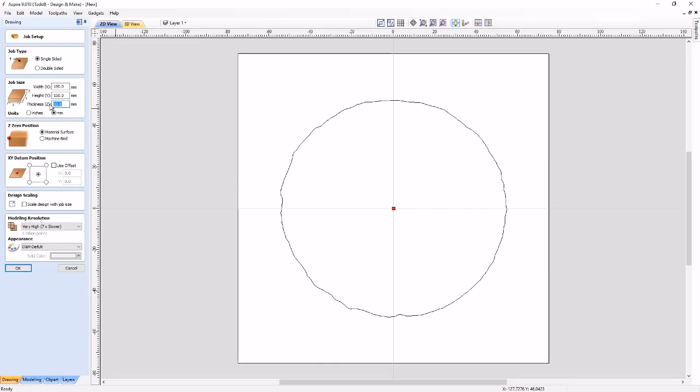Now I needed to go in, and I had forgotten that I was going to be using millimeters, not inches, so I needed to go in and verify the thickness of my material that I was going to be using in millimeters. So once I had that, I went in and selected that vector, and I'm actually going to create the wall thickness of my urn.

So I offset that vector about 15 millimeters. Wasn't happy with that - I decided to go with 10 millimeters instead. I think that was much better. Those are the only two vectors I'm going to need to create the two rings I need to build up my urn. So once I had those, I'm going to create a profile cut right through my material.

I'm going to go on the outside of those lines, and then now I'm going to go ahead and add in some tabs. I miscounted the number of tabs I needed, so once I added those, I went and double clicked on the ones I didn't need anymore to delete them, which worked out really quite well. I really only needed 4 on the outside and 4 on the inside.

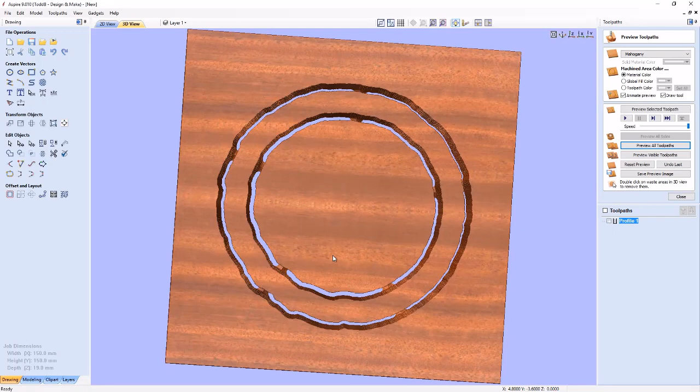I set up the actual dimensions of those tabs. I like to use 3D tabs, and I calculated that. Previewed my calculations, and everything looked pretty good. So I'm going to run this toolpath twice for 2 rings, which would give me a double, once I glued them together, the perfect height for the inside of my urn.

For the next toolpath, this was for the plate that goes in the bottom of my urn. I copy and pasted the outside vector into a new job, and then went ahead and created the tooling for that vector. It was just a profile cut, but if you notice, I forgot to change the thickness of my material.

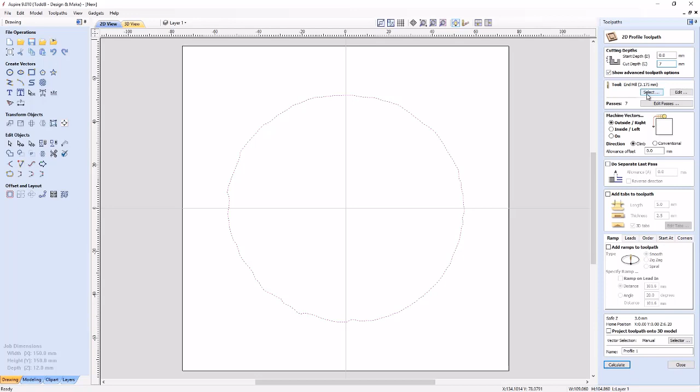Which is fine, it'll tell me that in just a minute. So I'm going to add in my tabs, make sure everything is fine. This time I'm going to add in 5 tabs. Check everything out, take a look at it.

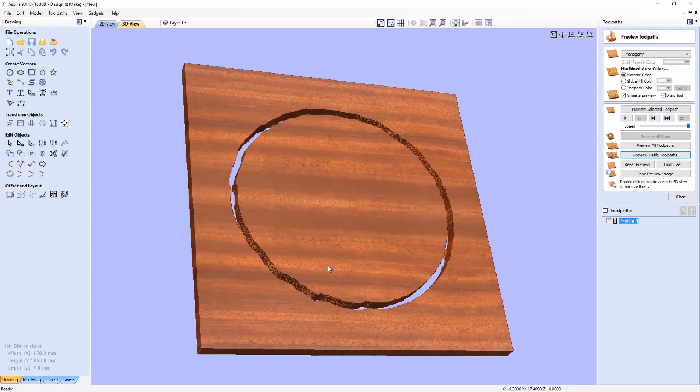I noticed then that my material was set too thick, so I changed that to the new material thickness, recalculated my tool paths. Took a look at those to make sure everything looked okay, and everything looked great. So I'm going to go ahead and save those off.

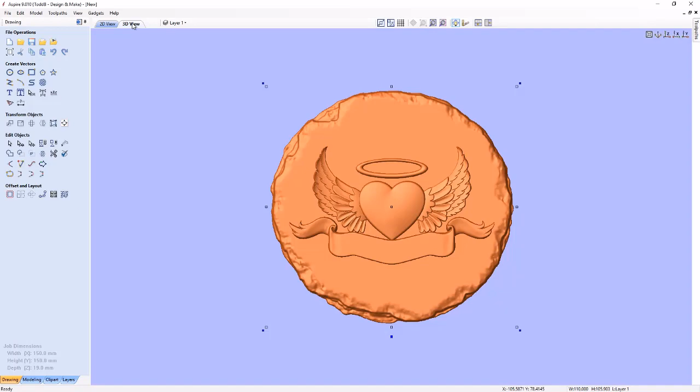The next thing I had to do was develop the toolpaths for the top. So I went in and created a job the same size I did for the rings. I brought in my assembled layout, sized it the same as what I used to create the vector to cut the rings with, made sure everything looked okay.

I imported the paw print vectors from the Furry Friends #1 project because I wanted to recess a paw print in the middle of the heart. So when I brought those in, I had to ungroup them, delete out the small paw prints, and then attempted to align the paw print with the center of the heart.

Now I couldn't see the bitmap representation of my component very well, so I ended up having to right click on that and change the properties, make the transparency a little bit darker so that I could make sure I could see what was going on.

Then I went ahead and created some text for VCarving on the top, the name of the pet. I chose a font that was pretty easy to VCarve, because I wasn't quite sure whether I was going to VCarve it or use a ball nose end mill to clean those out. So something without any serifs seemed to make a whole lot of sense.

I laid out the cookie text onto the ribbon and adjusted the kerning, and then I went ahead and created the text for the top flat spot of the garden stone.

This is where having no texture on that garden stone certainly helped out. Typed in the text I wanted, had to do a little bit of modification, decided that it wouldn't fit straight across, went back in again, made it into 2 lines of text.

That worked out great. Jogged it into place, copied that to the bottom. I wanted to use the same font size and everything with the stuff for the date at the bottom, so I copied it down there.

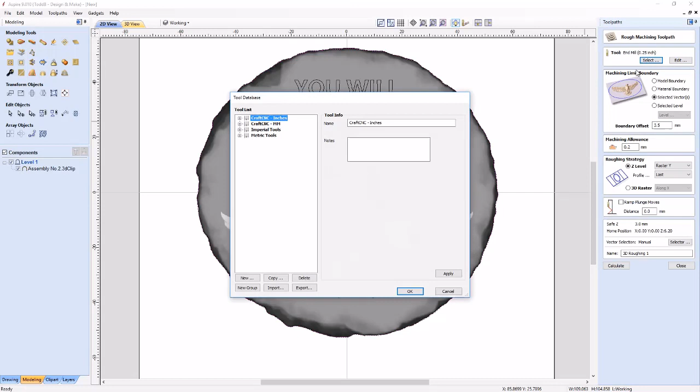Then I went in and set my boundary offset. I wanted that to be just slightly larger than the actual tool that I was going to cut with.

That way it would go outside my actual component a little bit when it was machining. Left a little bit of an allowance behind and went ahead and calculated that. Of course, I previewed my tooling to make sure everything was okay, and that looked great.

So now on to the finishing pass. I went ahead, selected my tool, offset it again slightly larger than my tool itself, just so that I could overshoot the edge of the component, and I went ahead and calculated that.

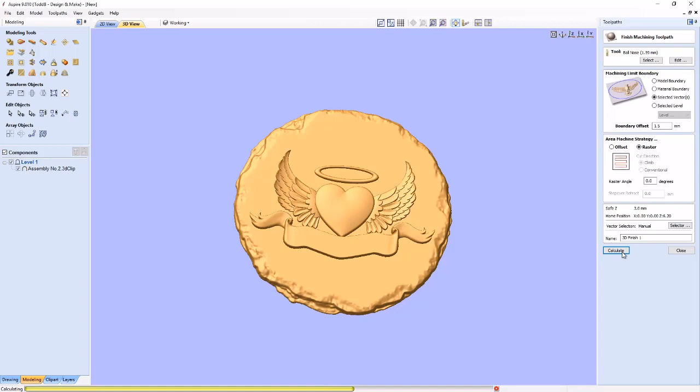That looked great. Now next it was time to go ahead and VCarve or pocket out the details on the top.

So I decided to go ahead and pocket out the paw print with the same finishing tool that I used for the top. I figured it would save me a tool change and some time, since it would take a bit longer to VCarve that. So I went ahead and did that, made sure that I projected that toolpath onto my actual component, and off I went, and that looked fine. I did want to make it a little bit deeper, so I adjusted the toolpath slightly. That looked great.

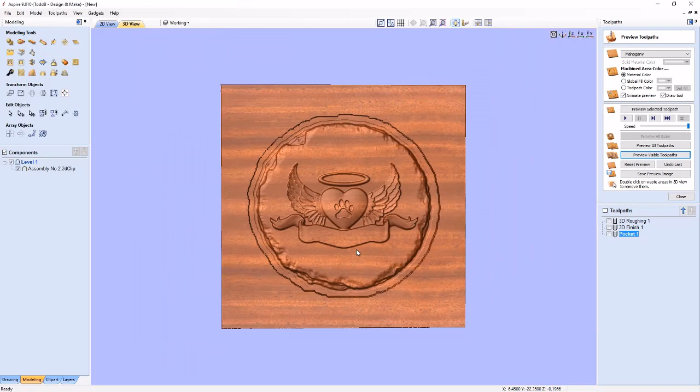So now I went on to the text. I wasn't sure whether I wanted to pocket that out with my finishing tool, or whether I wanted to VCarve it. So I thought, let's test it out with the pocketing tool and see what happens. I did a quick little try, made sure I projected it onto my component, and it didn't work. So then I had to go in and VCarve it.

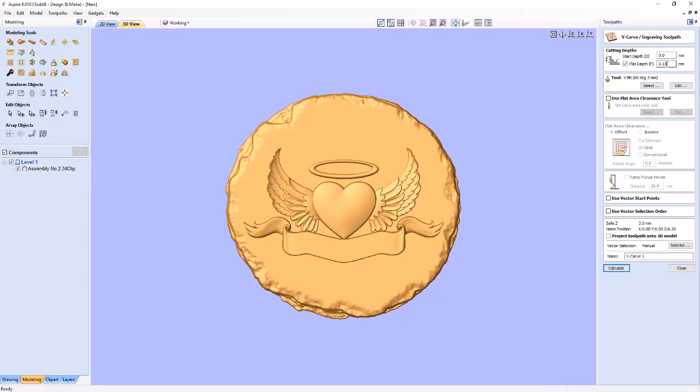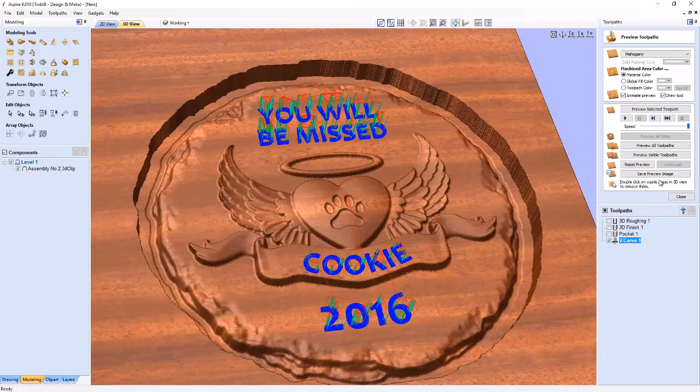One of the great things about this is when you preview your toolpath, you can make sure whether or not you're going deep enough with your VCarving. So you'll notice I do this 3 or 4 times, slowly making it deeper until I'm happy with the result. Really what I was looking for was just to make sure the contrast between the paw print and the text was fine. If I had been thinking, I could have just used the same depth as the pocket toolpath for the paw print, but I decided to do it the hard way.

Yeah, I guess I was happy with that. So now I'm going to go ahead and do my profile cut.

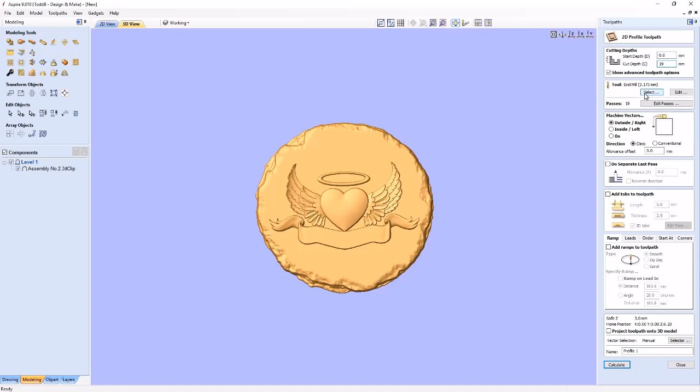So I'm going to select the outside vector, and you'll note that the bitmap that represents the relief or the component isn't faded again. It's still as dark as it can be. That's because I didn't go in and right click on that component to change its properties again. I just left it the way it was.

So I went and edited my tabs, making sure they were in a reasonable spot where I could remove them. Again, I like to use the 3D tabs, since it seems to make things look a little cleaner on the edge. I had a look at that and I was pretty happy.

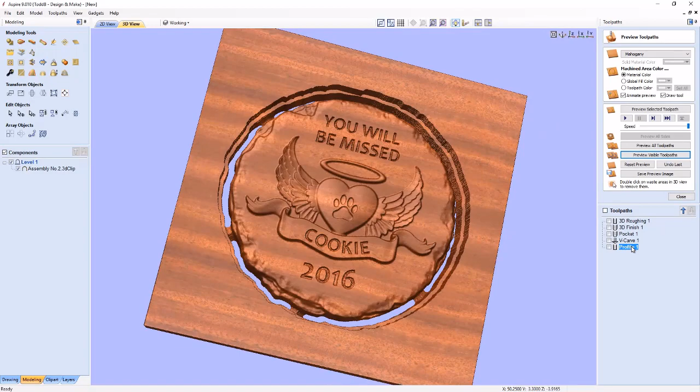Now I went and resorted my toolpaths a bit. I wanted to do the roughing pass and the profile cut all in one go, then the 3D finishing, the pocket of the paw print, and the V-carving last.

Okay, so now that you know how I actually developed the toolpaths for this, I want to point something out. I didn't show you how I made the inside ring for this. This was an afterthought that I put on. I kind of felt that most people at first would just want to glue the lid on and keep it that way, but in the end I felt it'd be more functional if somebody wanted to use it as a memory box, to actually have the lid come on and off.

So all I did to create this was open up the file I used to create the rings. I copied out the inside ring, pasted it into a new job, and ended up doing a profile cut on the outside, adding in my tabs, exactly the same process I used to build the bottom of the box. That was pretty easy, and it cut really fast.

So that was great. Now the next little bit of video you're going to see is me actually cutting it on the Craft CNC, which worked out really well. I went through the process of cutting all the parts, then cleaning them up, and then ultimately doing the finishing of the final piece. Let's go ahead and show you that.